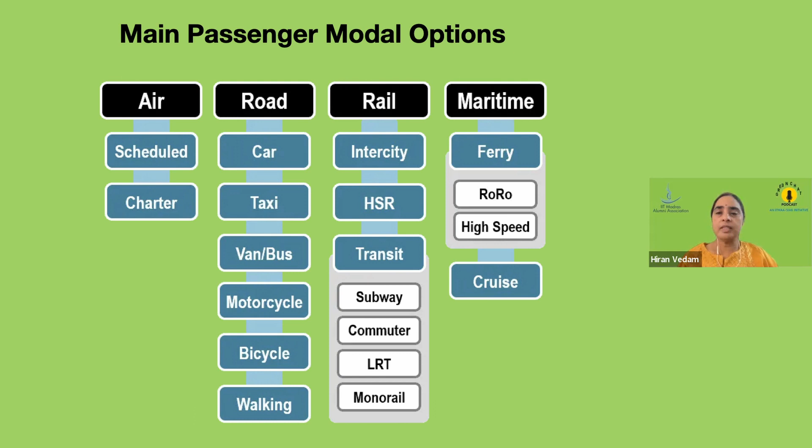Go ahead, Hiran. Thank you, Mux. The transportation sector is broadly divided into passenger transport and freight transport. Passenger transport modes are all familiar to us, from air travel to road, rail, and maritime. If you're taking a cruise, that's related to maritime. All the flights we take back and forth from different parts of the world is related to air. Everything from walking to cars to taxis or buses comes under road transportation. Intercity or subway system, metro system, all of these belong to rail transport.

Similarly, for the freight mode, we transport a lot of goods from one place to another, using air transport or trucks of different sizes. Our railroads in India contribute a lot to moving things from one end of the country to another. Maritime can be both your major ships, big ships that travel across the oceans, to inland and smaller vehicles that move through your rivers and sea closer to the land. In addition to that, we also move things through pipelines. We're all familiar with water that comes in our tap, that's municipal pipelines. Oil and gas are also transferred from one location to another using pipelines.

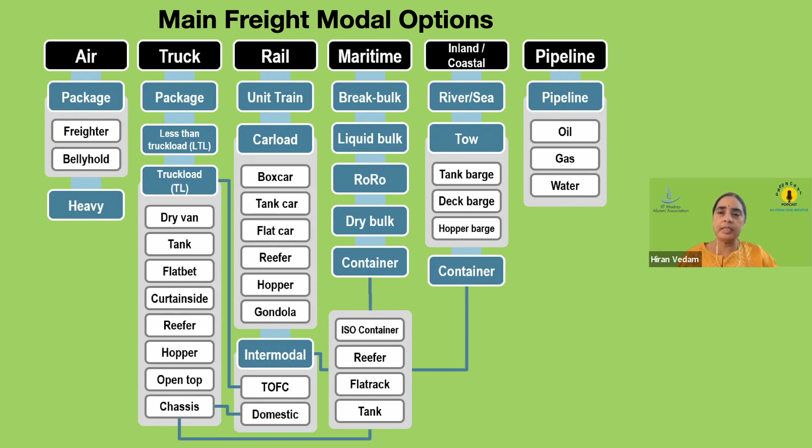If we look at the transportation sector, each of these different modes for moving goods require different kinds of infrastructure. These can be navigation channels and terminals for big barges that move inland, to ports needed to take on ships coming in between different countries, to airports, your road infrastructure that allows heavy trucks to travel from one place to another. And all of this infrastructure is very expensive to build and maintain.

Similarly, each of these vehicles have different tonnage or different capacities of how much they can transport at one time. For example, a big ship can transport up to 300,000 tons of oil, or 2 million barrels of oil at one time, down to smaller light commercial vehicles that we see doing our Big Basket and Amazon deliveries on a daily basis. Then there's the time it takes to transport goods across from one point to another through these different modes of transportation, which also varies.

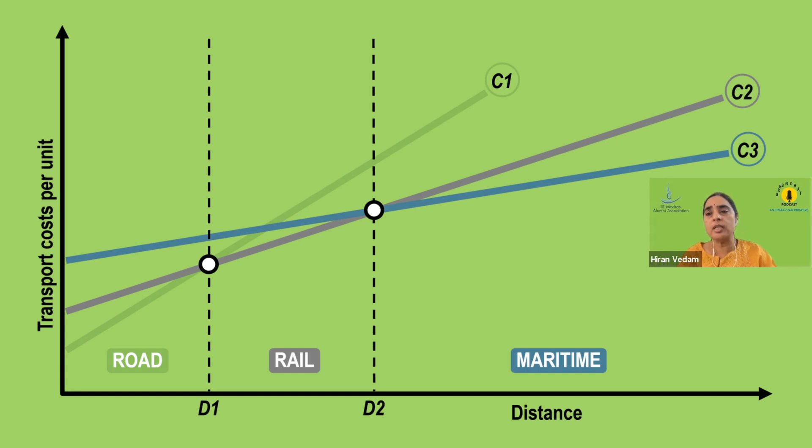So putting it all together, if we look at the cost of transportation, we are looking at lower costs for road transportation for shorter distances, so maybe within city transportation, or from city to city, nearby cities or towns. Those kinds of transportation are efficiently done using road. But for longer distances, like cross country, from the west to east coast of the country, you would need rail transportation, which is more efficient in terms of cost. And for even longer distances, between countries, for example if you want to ship something from India to Mexico or to Africa or European countries, all of this can happen most efficiently in terms of cost using shipping and the maritime industry.

Okay, so great. So we saw the first overview of overall what the transportation industry entails, what are the types of modes of transport. For those people who aren't even familiar with what is happening in the transportation sector, that was very good. For those of us who are still saying, hey, I knew this already, hang on guys, there's more coming.

Okay, so let's now focus on the energy use profile for the transportation industry. How is the energy use? How do you profile the energy use in the transportation industry, Hiran?

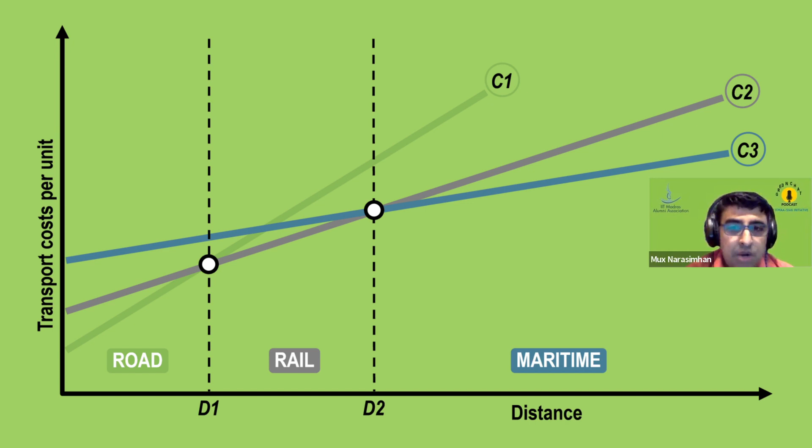Yeah, today most of the energy that's used for the transportation sector comes from fossil fuels. It accounts for 29% of the final energy consumption. And if we remember from episode 4, we said 22%, that's based on the 2005 numbers. So the energy used by transportation has actually gone up. And not only that, more than 95% of it is still non-renewable energy, pretty much all fossil fuel.

Wow. So my question was on this 96.3% non-renewable energy. This clearly warrants more electric or renewable options for energy for transportation, because it now accounts for 29%, not 22% like in 2005.

So now we're building the case for why other options need to be considered. Right now we're still at 3.7% renewable, out of which 3.4% is all biofuels, and very few, 0.3%, is renewable electricity. So that transition is what we are in the middle of, and it's almost hilarious to look at the 20-year transition that happened when we moved away from horses to motor vehicles.

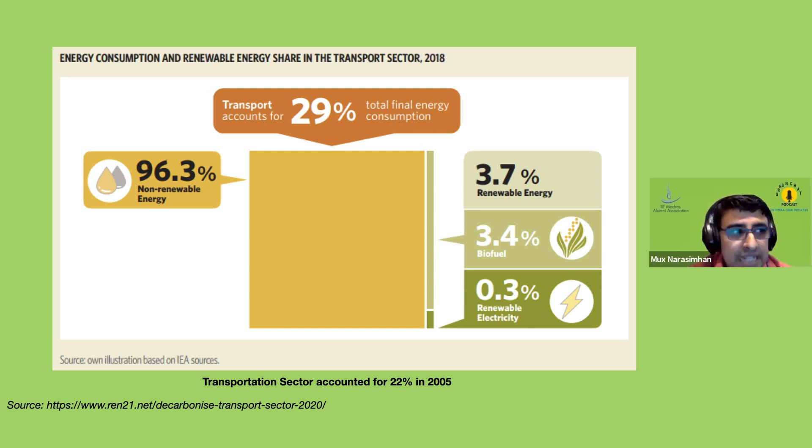And the primary driver was the pollution caused by the horses and the manure that comes out of them. So now we're facing the exact same scenario for the fuels and their emissions that we've been consuming for a long time, and the death or demise of the fossil fuels is on its way, and it might happen as fast as what happened to the horses. Let's run through the scenarios here.

If we double click on the fossil fuel consumption and look at where it is going, 89% of that is used for road transportation, air accounts for about 7%, and very little for the rest. And even within road transportation, 59% of it is used for just moving people. Passenger transport, these are private vehicles, accounts for 59% of the energy we consume for road transportation. The other big chunk is your freight.

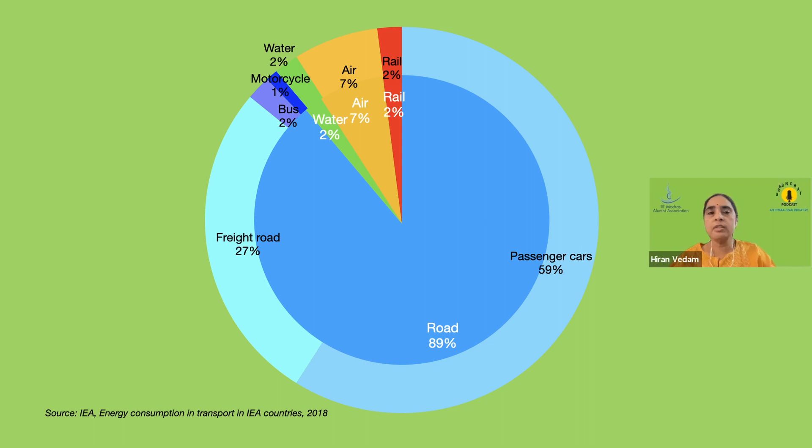And if you look at the global numbers, motorcycles account for only 1%, a very small percentage in terms of energy. And I think that's global data, right? 1% is global data, whereas in India the number is quite different. Two-wheelers account for 70% of all vehicles in India.

And they account for 20% of CO2 emissions, or 30% of particulate emissions in India. We'll come to the emissions later, but that's the data for two-wheelers in India, and why so much focus is on two-wheelers right now. Also, two-wheelers account for 60% of annual vehicular fossil fuel consumption from 2016 to 2019 in India. Even though the problem in terms of energy utilization is only 1% globally, in an Indian context these are bigger problems. That's the only point I'm making.

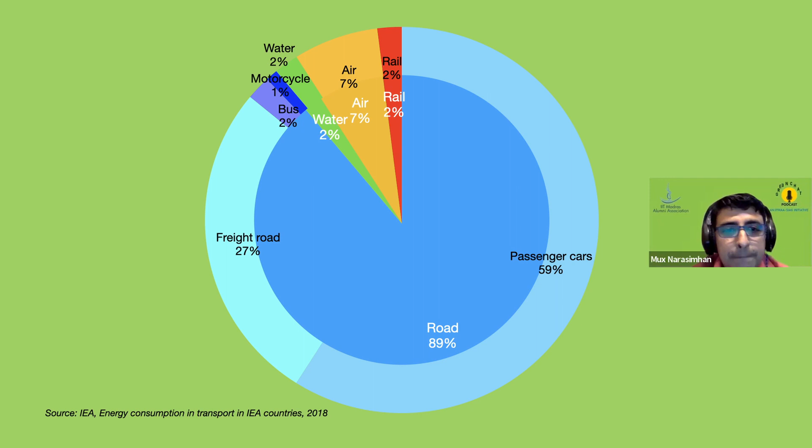Go ahead. Certainly. And not only that, we're using so much energy, and only 32% of it is actually converted to kinetic energy to move things. More than 60% is lost, either in heat or in all kinds of emissions that are not generating useful energy. That's kind of crazy, right? Imagine, when we used to walk or take horse vehicles, I think the energy efficiency there is almost nearly 100%.

Mechanical energy to mechanical energy, it doesn't require any conversion. Whereas all these fuels that go through conversions, I'm not even going back to how the fuel was produced, the energy efficiency and inefficiencies in that. Just from the fuel, the potential energy stored in it, to what converts to mechanical energy, we are losing 68%. Yes, and that's a big chunk. And this is what we need to improve if we need to reduce energy consumption globally.

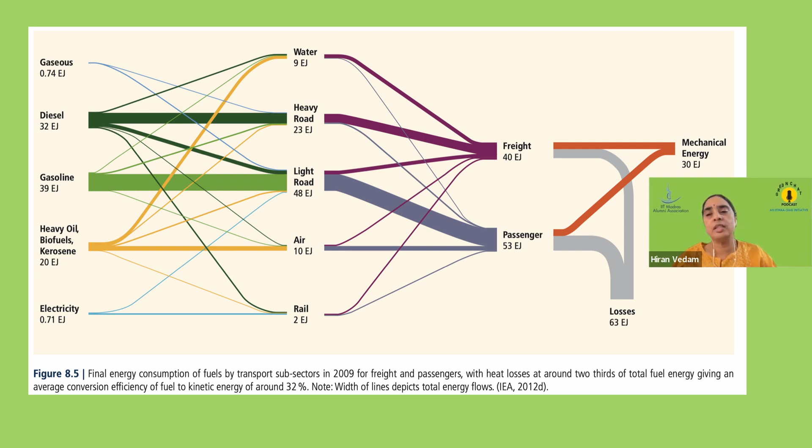We'll get to the improvement portion in the next episode. We're going to run through the scenarios of efficiency of each of these and what's being done to improve that in episode 8. But let's run through 7 first. So now we talked about the energy piece, consumption and efficiency and all of that.

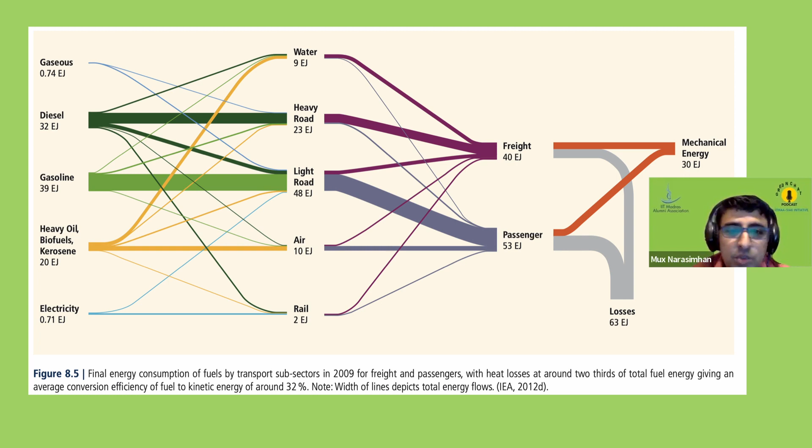I think we should now quickly delve into the GHG emissions and any other externalities, especially if we can put a cost number to it. That'll be great, Hiran. Go for it. Sure, Max. So if we look at the global CO2 emissions and the contribution of transportation there, 24% of it, of the global CO2 emissions, come from transportation. And within that, more than 70% is from road transport. So road transport is the biggest contributor to GHG emissions, especially CO2 emissions.

The other big contributors are your aviation and shipping industry. And this total contribution of transportation to GHG emissions has been going up at roughly about 2% since 1990. And the contribution of road transport is proportionally increasing, now at about 69%, which is a big chunk. Not only that, there are other negative externalities due to transportation. Most of us in India are familiar with the number of accidents that happen on the roads, and accidents by car or motorcycle are a heavy economic burden.

The particulate matter that emits from your tires, from the fuel that we use, and all of that, is the second largest contributor. And in addition to PM 2.5, you also have other volatile organics coming out, and NOx and SOx, which are leading to lower atmospheric ozone formation. This contributes to raising temperatures locally. So we have GHG emissions that lead to climate change directly, but there are all these other things happening, accidents, particulate matter, and all of this, that are also very expensive. Not only are they expensive, there is a heavy human cost to it. Between 2010 and 2015, the PM 2.5 and these ozone forming chemicals have led to nearly 400,000 deaths.

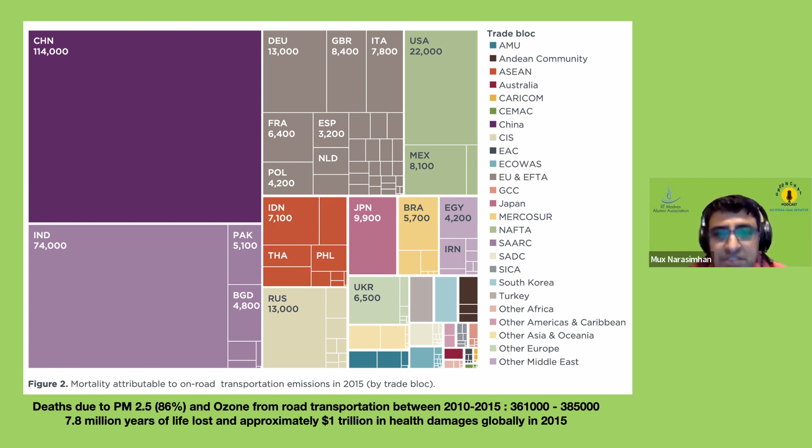There are various scenarios developed by different agencies, but let me show you one to give a feel for what we are trying to do. The ICCT came up with a report in 2020, where they used the baseline carbon emissions from 2020 and projected what it would be by 2050 based on the growth of these different vehicles.

What they found is that by 2050, if we leave it as it is, we are going to go up to about 20,000 million metric tons, and we are now around 12,000 million tons. So there is, and already we are seeing, the impacts of the transportation sector.

So what we need to do, per the scenario they've described, is two main things. One is invest in zero emission vehicle technologies, and we'll be talking a lot more about it in our episode 8 as to what those improvements are and how we are doing it.

The other piece, which is in many contexts a low-hanging piece, is your efficiency and emission improvements. And even easier things to do are compliance improvements, because if we even try to implement the compliance requirements we have placed and impose strict penalties, that contributes to reducing your GHG emissions, CO2 emissions.

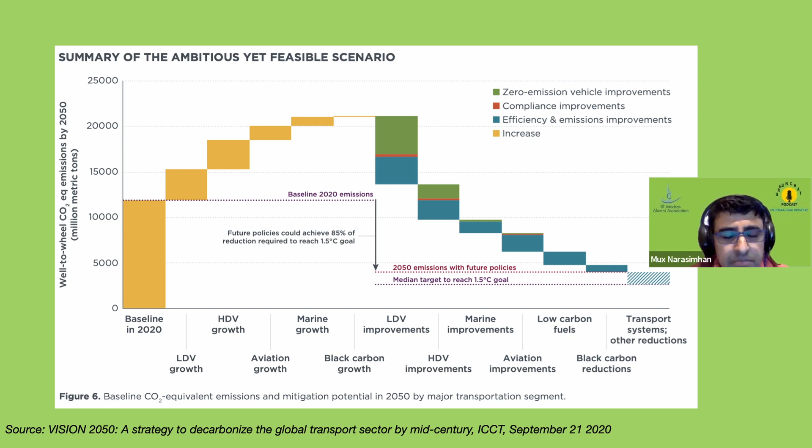But it looks like your zero emission vehicle improvement and the energy efficiency improvements are roughly the same order of impact, more or less. Yeah, it varies depending on the sector. For LDVs, light-duty vehicles, definitely the zero emission vehicles are the biggest chunk. In other sectors, like heavy trucks and heavy vehicles, they are about the same. It changes depending on which sector you're looking at.

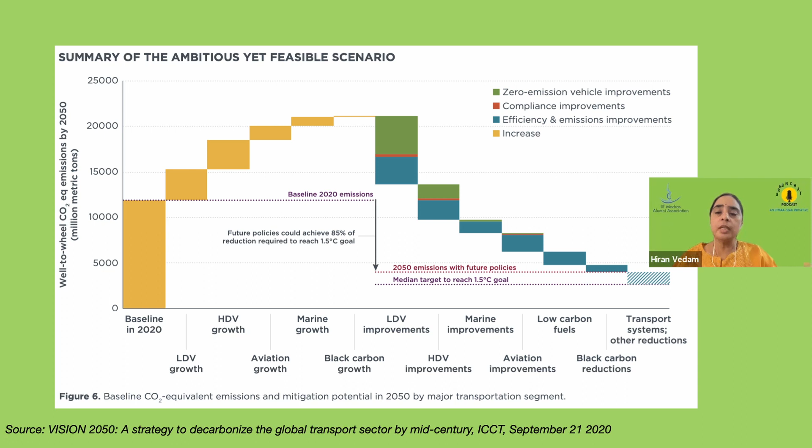So let's talk about these two, touch upon it, we'll go into details in future episodes. Sure, now let's talk about how do we move towards net zero and the improvement of energy efficiency, improvement of all these efficiencies.

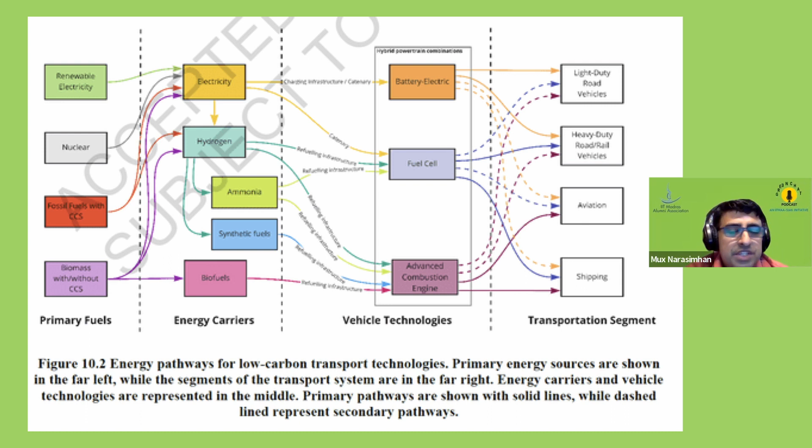For zero emission efficiency, we have primarily three choices of technologies. One is around using electric vehicles, which is now already in the market for certain segments. Then you have hydrogen fuel cell based vehicles, again available for passenger cars now, and experiments are going on in other kinds of transportation. Or you can use advanced combustion engine technologies. We will discuss all of this in our next episode.

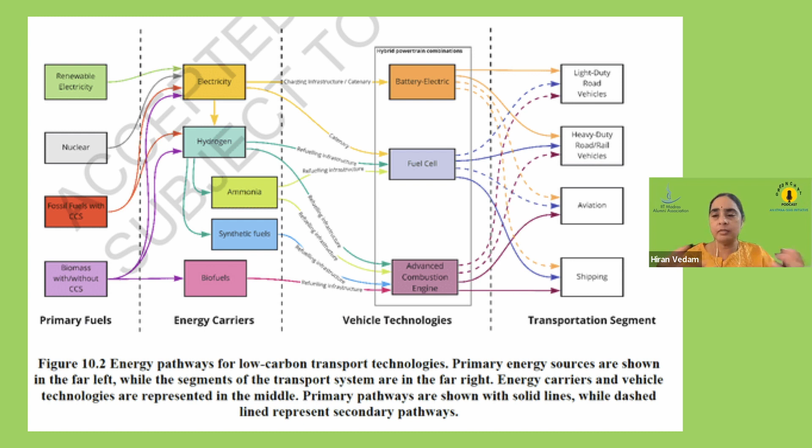Apart from this, we can look at the energy efficiency piece. The way to look at energy efficiency, at least in the road transportation sector, is to use the avoid, shift, and improve framework. The avoid bit is about designing our cities and towns better, so that we don't have to actually travel by any mode of transportation, and everything is available within your community and so on. That's your smart city kind of structure. The other one is shifting your travel efficiencies.

If you must travel, I think we should look at more optimal modes of travel for each trip. And then while you're using the vehicle, there are continuous improvements being made in the vehicle efficiency itself.

Great, so I think we have come to a logical end of this episode, episode 7, where we just basically scraped the surface of the transportation sector. We talked about energy consumption, energy efficiency, greenhouse gas and mortalities, and several other negative externalities, what some of the challenges were, how do we move forward towards net zero, and what options are starting to get available now from a market perspective. We'll delve much more deeply into it in episodes 8 and 9.